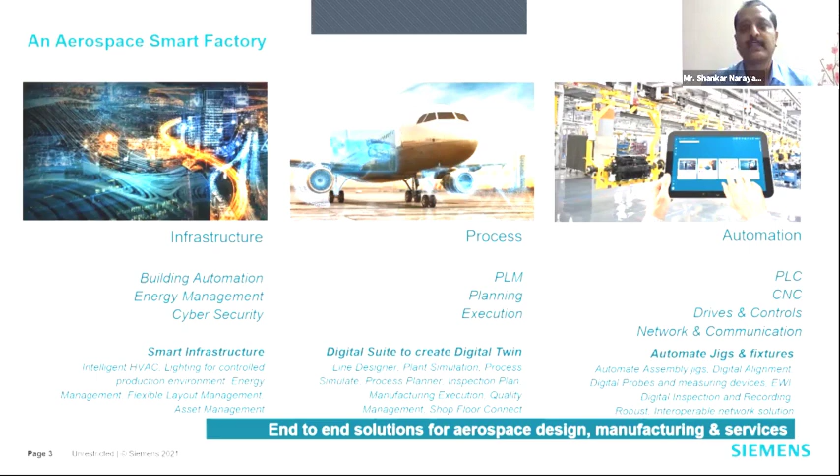For any execution, we would also need a mechanical component integrated with the electrical and electronics part. That's what we say during the electrification stage and the automation stage. Automation certainly includes certain hardware for line building or machine building aspects, where edge kind of devices are being utilized in the current environment. Edge means very smart devices, which help the process achieve better results.

To go into the details, I will share 3 more slides on the infrastructure piece as well as process and automation. Coming on to the infrastructure part, today we are talking about 3 different parts: 1, smart energy; 2, smart buildings; and lastly, smart environment.

Today's investment in aerospace and defense has boosted significantly. A lot of private players and defense organizations are coming into this particular industry area and starting up new factories with their expertise, going forward and contributing their portion to this particular vertical.

What we say in the smart energy aspect is the clean energy or energy sources like renewable sources or captive power sources, solar energy or wind energy which is available for setting up a plant, and the smart grids which are also going to distribute power to the plant at different locations.

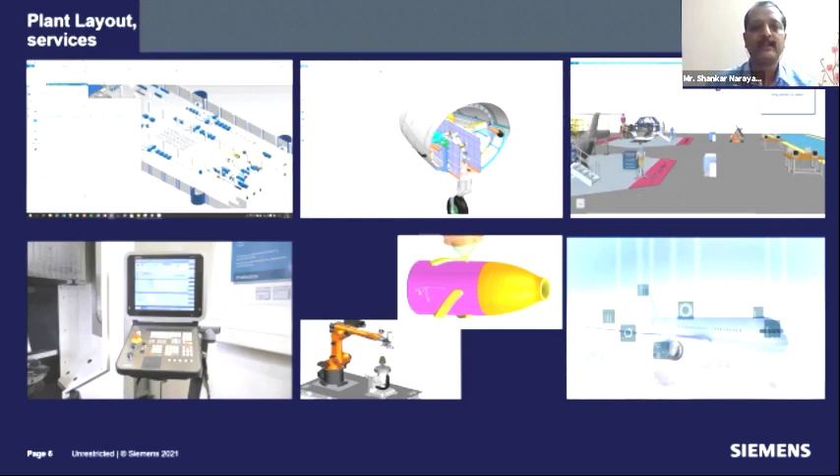When I said about virtualization, the softwares are predominantly going to help people in creating the plant layout. The first video on the left-hand side shows the creation of a plant and line setup, how my plant exactly should be looking, where my assets are to be accessed. That's a way you can easily plan the placement of machineries and various equipments.

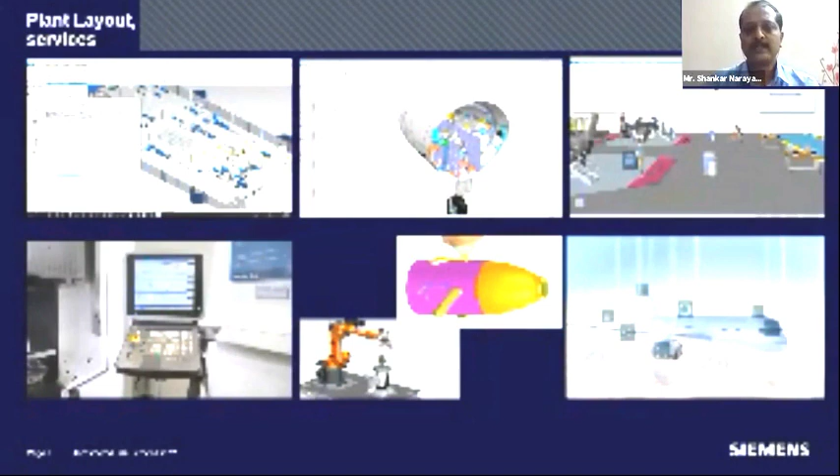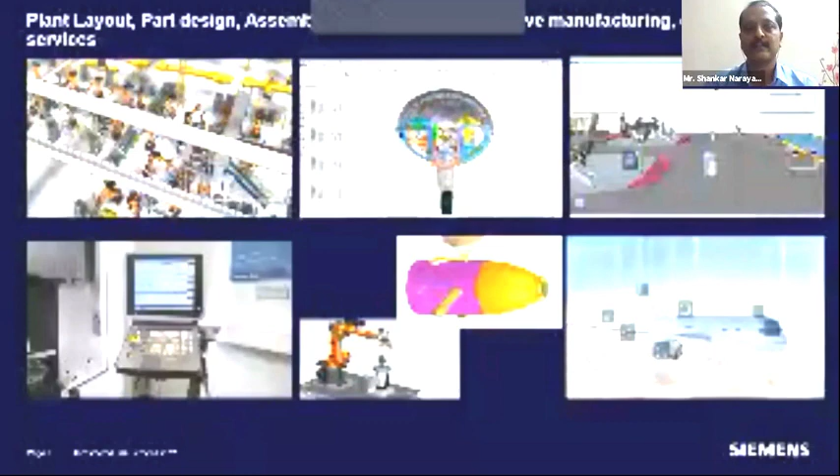Next comes the part design. Though we talk about standardization on part design, there are multiple iterations and ideas from the customer to do modifications. This will really help in the simulation mode to create a model and verify the relevant characteristics, be it physical or thermal, visualize it, verify it, and evaluate the results before production. Next comes the assembly part.

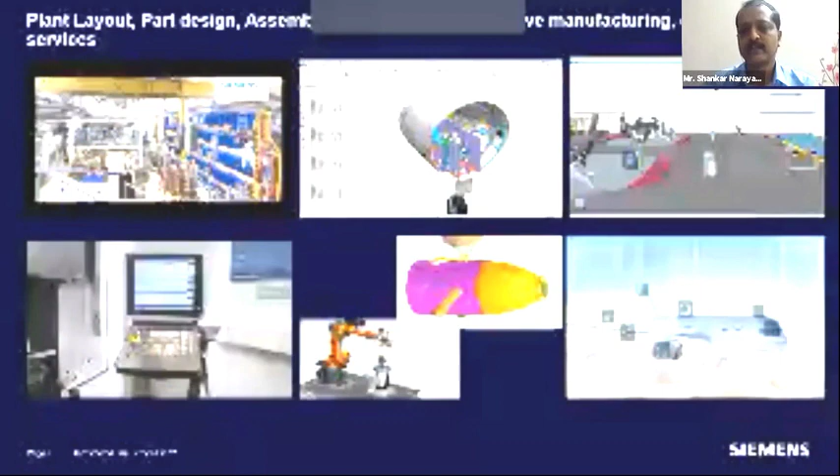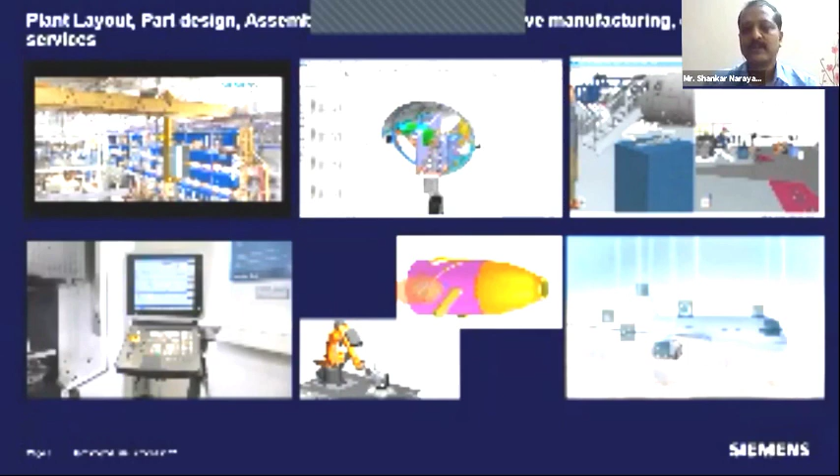Assembly, more so in aerospace industries - even the bigger giants in this industry are slowly improvising themselves from manual mode to automated mode, wherein an AGV moves the part from one bay to a new bay where the assembly is to be placed. So that's where automation can play a major role.

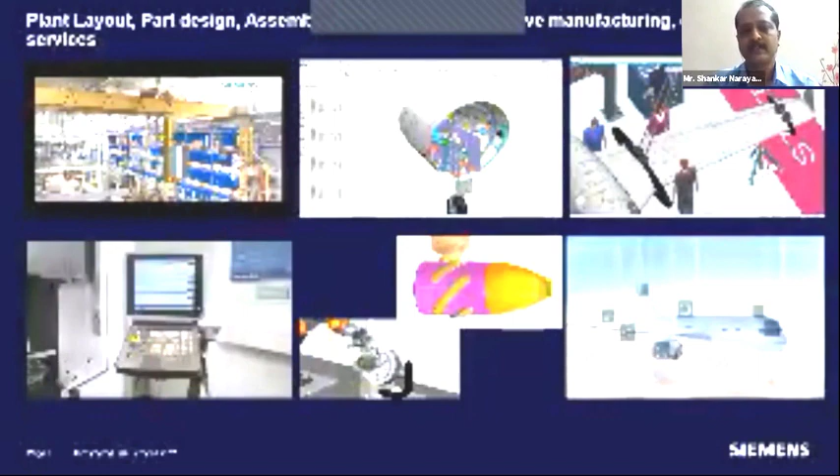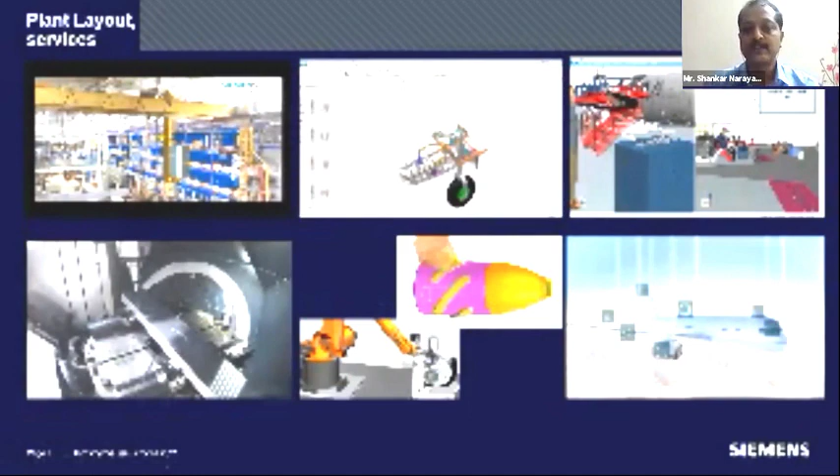Coming to the global supply chain of part production, complex technologies and precision manufacturing are a requirement from the industry, and quality is a higher preference. Technologies like 5-axis machining, mill-turn applications in the CNC area, hybrid machining like additive and subtractive machining together in a particular machine, influence of a robot to do machining, or process related actions like riveting or drilling - all these are prime requirements of an aerospace industry, which can be very well simulated in a virtual environment and related to the real environment once every hardware is set up.

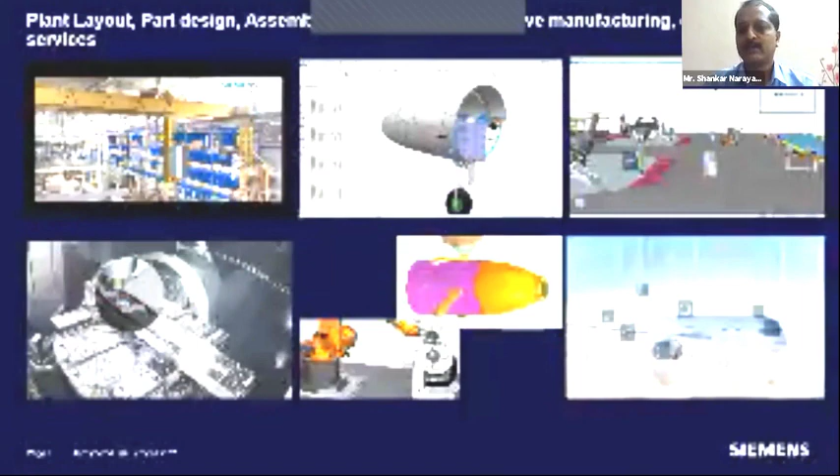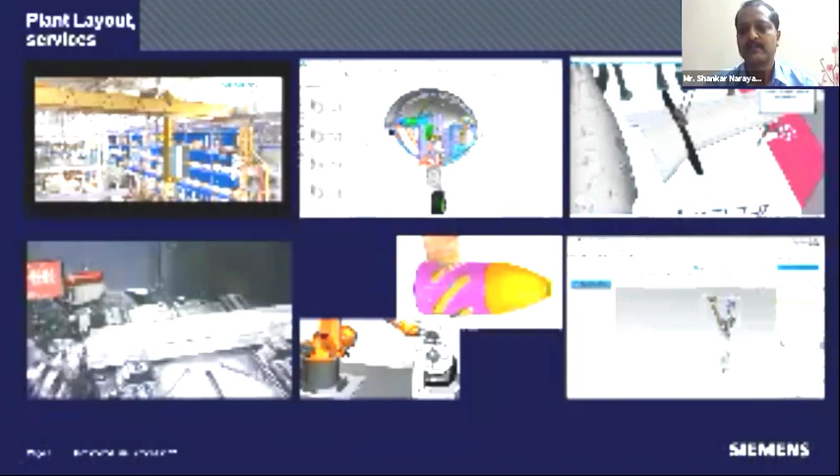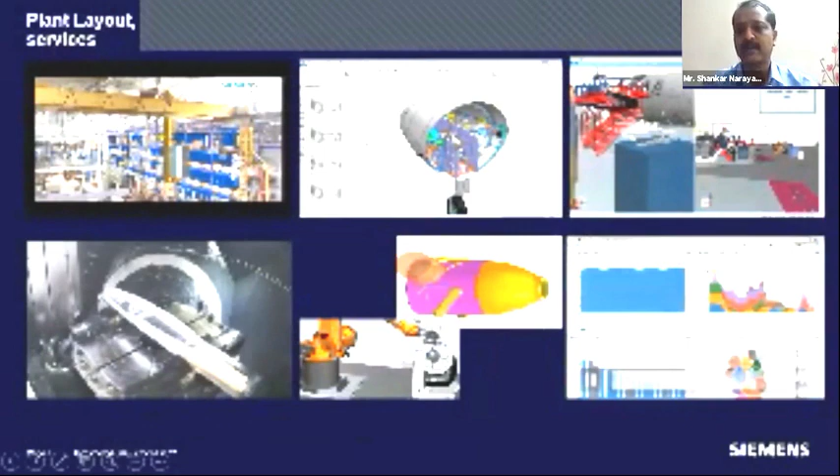Lastly, I would also like to mention connected planes - the information passed on from one aircraft which is on the move to the control center at the destination premises. Here we're going to see the services part of an aircraft or component manufacturing. The information based on the KPIs to be monitored lets us create good analytical data on the performance of a particular component manufacturing or a complete assembled component or aircraft. That data could give a lot of insights for people in this industry.

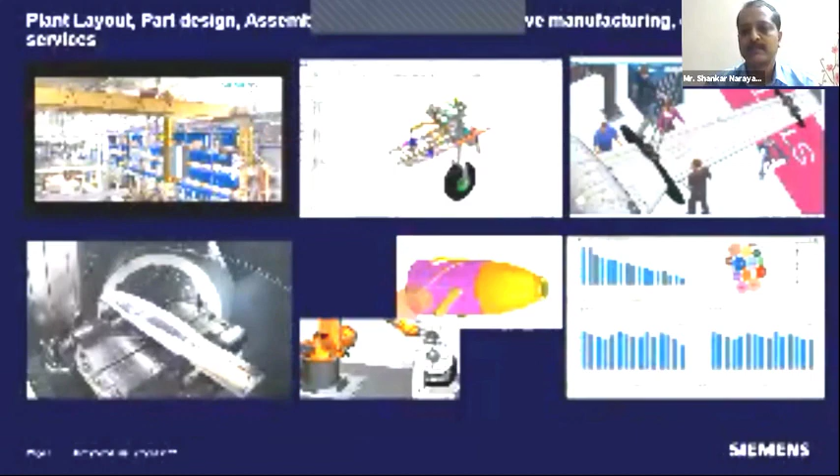And the real one is information. What I want to share here is that you do not need a well-skilled person to know about each and every technology I mentioned. The basics of manufacturing, basics of design would do good for all these applications to be implemented.

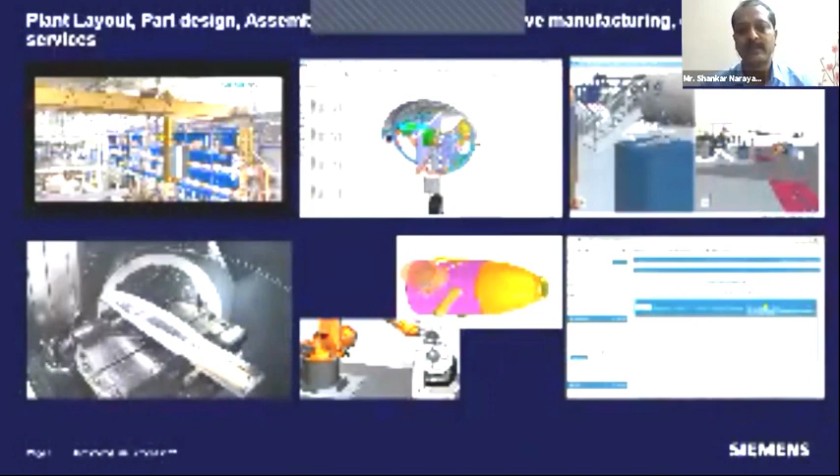We also see that when I say connected machines, connected flights, or connected environment - what we say as connected is connecting the IT and OT layer, in three different portions. There are field devices like industrial controls, distributed IOs, drive systems, which are all predominantly at the lower part of the factory setup. There are controls and operation panels and HMI.

These are the equipments enabled with edge computational analysis of the data of the process, as well as the automation part, and they give this information back onto the software layer - the management in the cloud or the software layer, creation of an IoT app.

We have one such wonderful product called Mendix, used to create apps for the relevant technology for people in this particular industry or any industry. And again, there is no typical skill required to create an app. So the data from the lower layer of operations, control, and field devices would be fetched or picked up from these devices to the cloud platform.

Mindsphere is one of the platforms from our company, which sets pace for all the industrial applications, not only in aerospace, but also into other industrial applications as well.